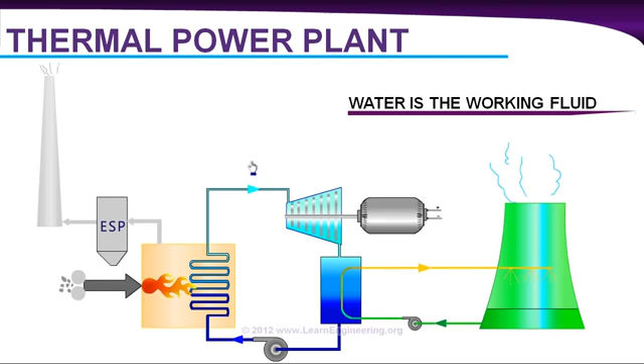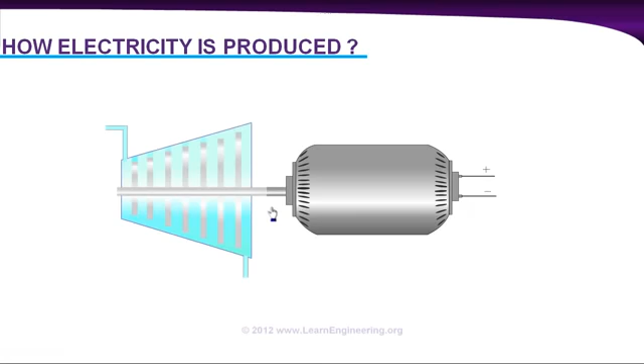So the basic question: how is electricity produced? The answer is, using a generator. If we can rotate the shaft of the generator, we can produce electricity. In thermal power plants, we rotate this shaft with the help of a steam turbine. You connect a steam turbine to the generator shaft, and if you can rotate the blades of this turbine, you get electricity.

The next question: how to rotate the blades of this turbine? The answer is this: supply high pressure, high temperature steam at the inlet of the steam turbine. Thanks to the high pressure and high temperature of the steam, it can rotate the blades of this turbine, and so you generate electricity.

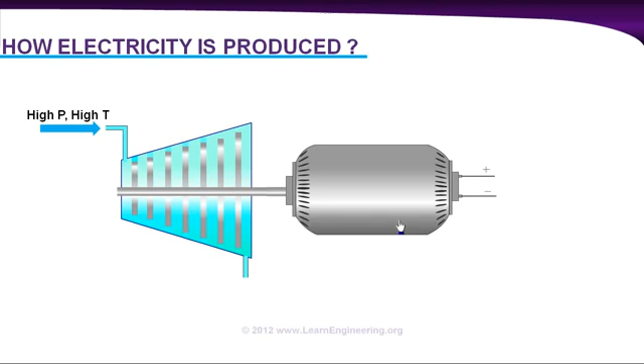So you can consider the steam turbine as the heart of the power plant, which absorbs energy from the fluid. We have achieved our objective, we have produced electricity. But the main challenge here is how to produce this electricity continuously.

When this high pressure, high temperature steam passes through the turbine, the blades rotate, and in doing so absorb some energy from the steam. So the steam will obviously lose some energy, and at the outlet of the steam turbine, you can see the fluid is at low pressure and low temperature.

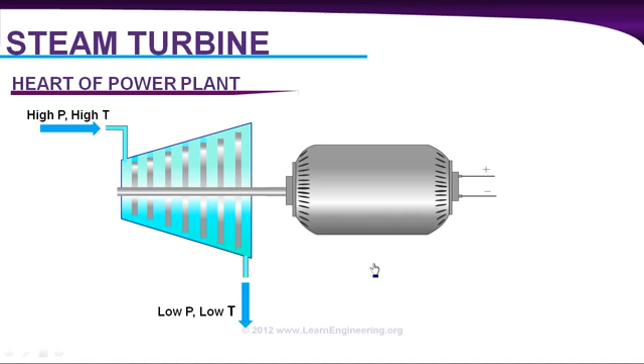So if somehow you can bring this fluid back to its original state, to high pressure and high temperature, then you can have a continuous process, and you'll get continuous electricity from the generator side. That exactly is our challenge in a steam power plant: how to convert this low pressure, low temperature steam back to its original state, meaning back to high pressure, high temperature steam.

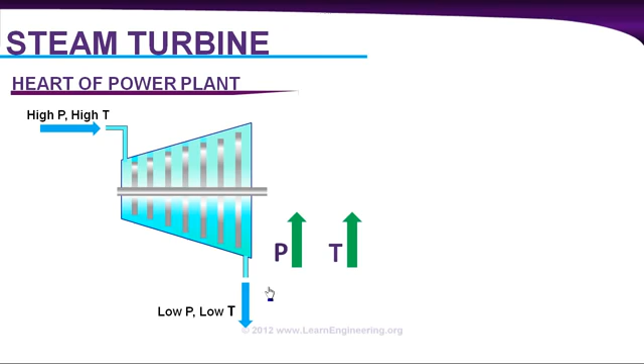Now back to the basic question: how to increase pressure and temperature to a higher level? So you have two objectives: first, increase pressure; next, increase temperature. If you want to increase the pressure of this fluid, obviously the answer in your mind is, just put a compressor after this, right? Your answer is right, but the problem is, if you want to compress a fluid which is in gaseous state, you will require a lot of energy.

This means such a power plant will have very low efficiency. Instead, if you can convert this fluid into liquid state, then the compression will require very less energy, or it's easier to compress. So before increasing the pressure, we'll convert this steam into liquid state. For that, what you have to do is reject some heat to the surroundings.

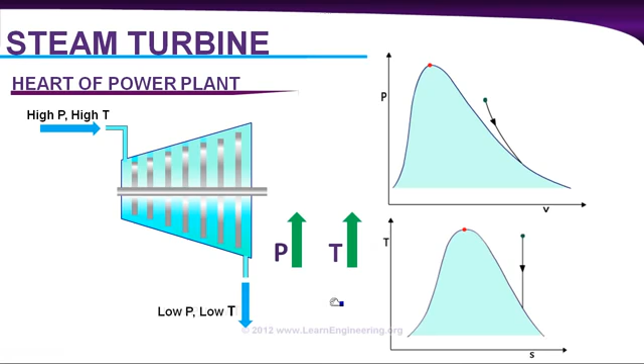You put a condenser over here that can reject heat to the surrounding, so vapor will get transferred into liquid state.

Now this process can be drawn in PV and TS diagram like this. During heat rejection there is no pressure change because fluid is free to expand. And obviously this is a phase change, so temperature cannot change. So this is in TS diagram. Now the fluid is in liquid state.

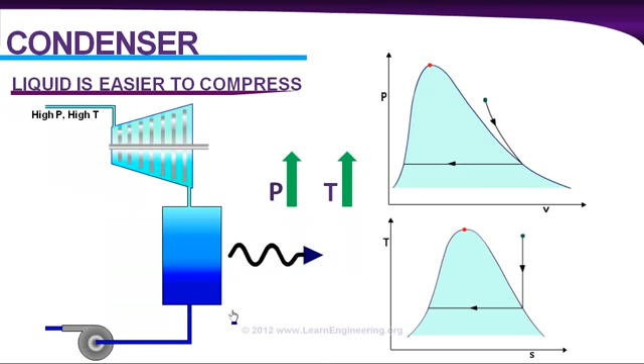Now you can put a compressor and raise the pressure. Here it is, a compressor connected right after the condenser. So you can see pressure rise in PV and TS diagram like this.

Pressure has increased to the original state, and you can see volume of the fluid doesn't change over here. This is because we are compressing a liquid. When you compress a liquid, there won't be much change to the volume, the change will be minute.

You can see the same process in TS diagram like this. There will be a slight increase in temperature, but it's almost negligible anyway. First objective is over; we have increased the pressure now. Now we can concentrate on how to increase temperature back to its original state. The answer is simple: just add some heat to the exit of compressor.

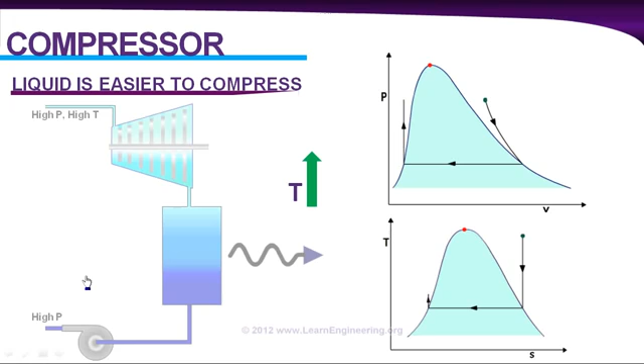So it will be like this. We will use a heat exchanger called boiler, and we can add heat from outside to the fluid. Obviously temperature of the fluid will increase back to its original state, and you can see it over here.

Temperature rises from here to its original state, and during this process pressure remains the same because fluid is free to expand. Now the cycle is complete, and this cycle is known as Rankine cycle.

This is a basic Rankine cycle. In order to execute this Rankine cycle in a power plant, you will need some other accessories, especially for heat removal and heat addition. We will see that. So forget about thermodynamic cycles now.

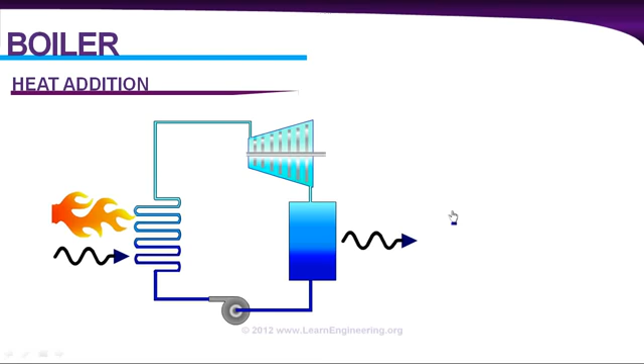First, for heat rejection: if you want to remove heat from this fluid, you have to supply a colder liquid through this heat exchanger. For that purpose, we are using something called a cooling tower. A cooling tower always will have cold water inside, and you can pump it over the condenser and it will absorb some heat. Finally, it can be cooled back to its original state using natural convection phenomenon.

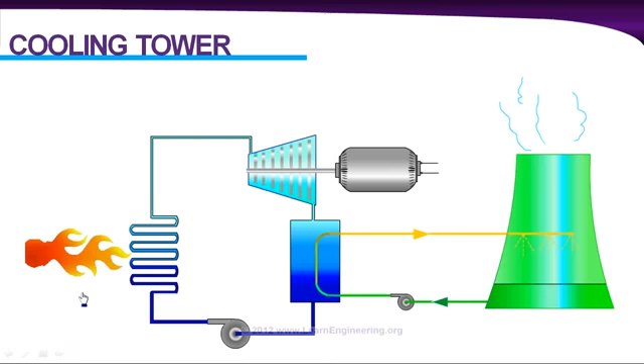Now next, how to do this heat addition practically. For that, you will use something called a boiler furnace. In a boiler furnace, heat is supplied continuously to the water inside the heat exchanger, and this heat can be produced with combustion of coal or with help of nuclear energy.

Assume your fuel is coal, then you have to powder the coal first, and this pulverized coal can be supplied to the boiler furnace. Here it will get mixed with air and it will produce a tremendous amount of heat.

But during this combustion process, since the fuel supplied is coal, it will produce a lot of pollutants. There will be a lot of ash, suspended particles, sulfur. So you have to handle this exhaust very carefully, and handling of this exhaust gas will form a huge portion of the power plant in fact.

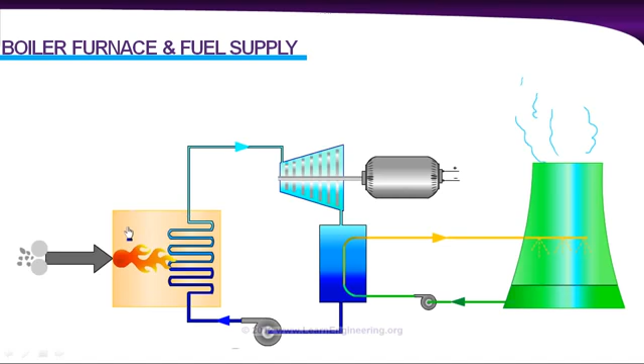It will be done like this. First you will take the exhaust out, and it will pass through an equipment called electrostatic precipitator. Here most of the suspended particles are removed. Now the exhaust gas is much cleaner, and that can be ejected to the atmosphere with the help of a chimney.

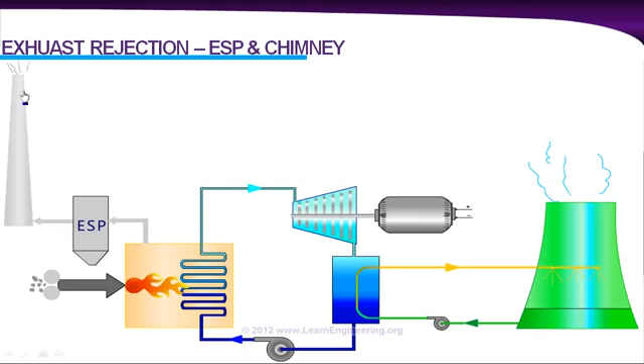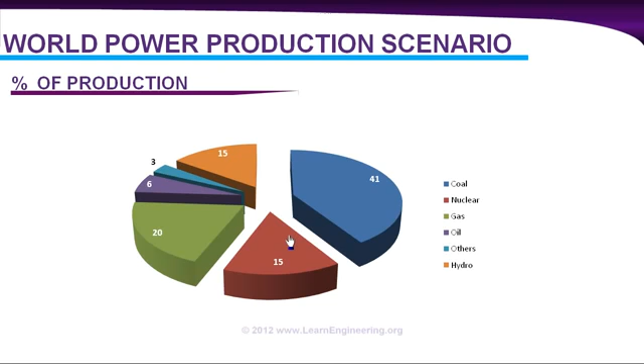Before winding up the lecture, we will have a look at current world power production scenario. You can see coal and nuclear combinedly produce more than half of world's power, and both come under thermal power plant because the working fluid of both is steam.